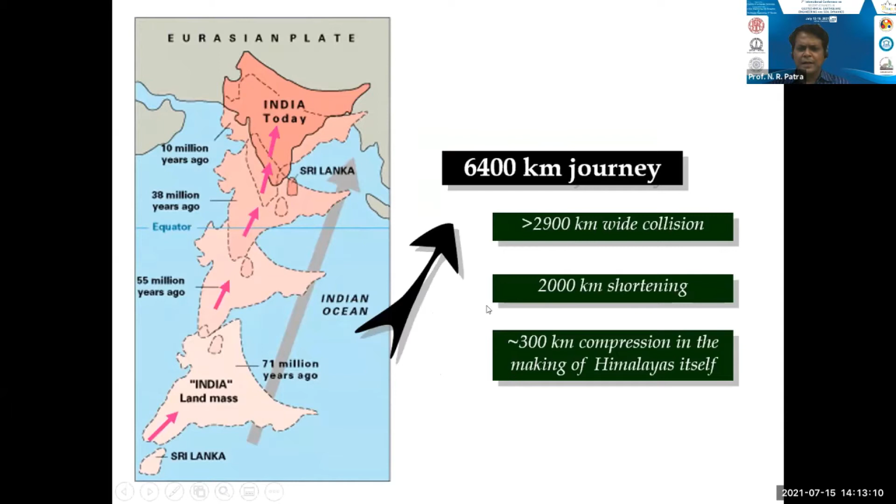Let me start briefly with how the Gangetic Plain has been formed, particularly the Himalayan region in India - how it has been formed. It is about a 6,400 kilometer journey, starting with 2,000 kilometers, and 300 kilometers of compression in making the Himalayas itself.

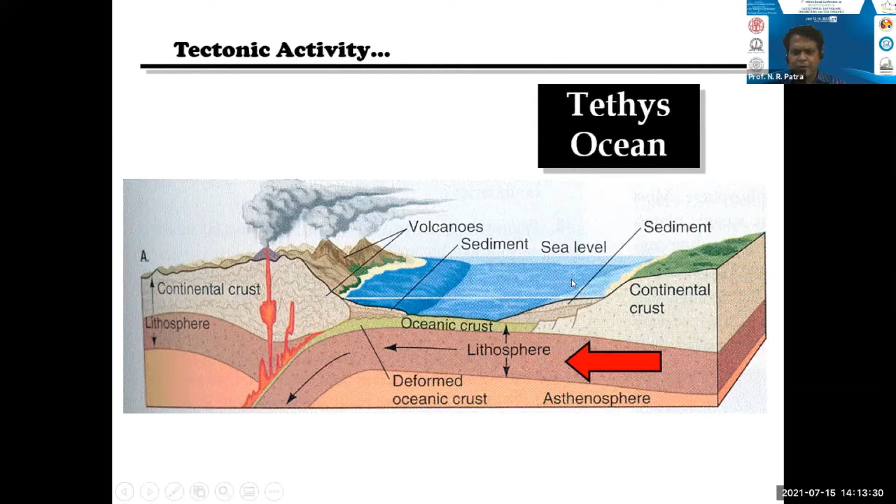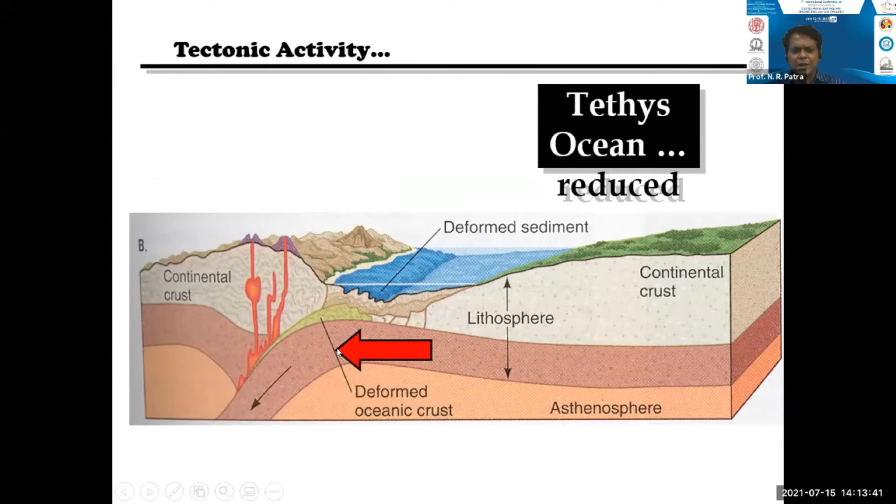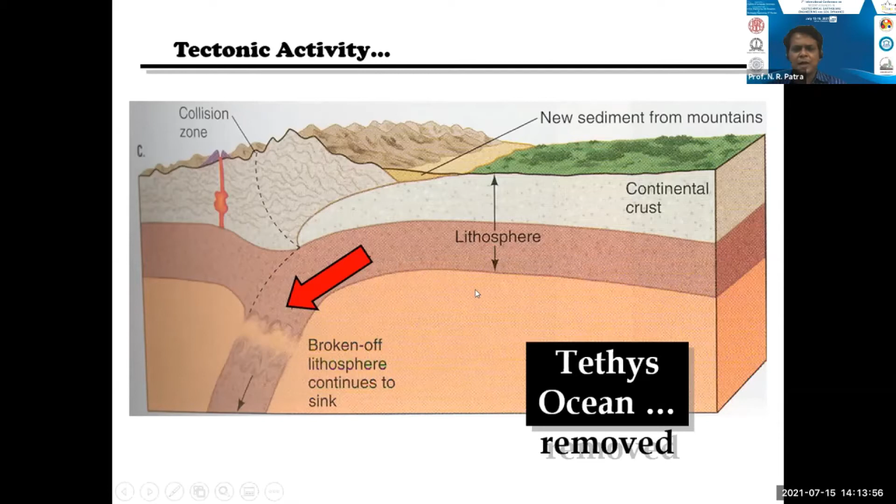Now, in brief, how this Gangetic Plain starts. If you look at tectonic activities, initially there is oceanic crust, lithosphere, and sediments, and volcanoes are present. Over the period of time, this lithosphere deforms, there is deformed sediment here, and deformed oceanic crust also. Over that period of time, new sediment from mountains, and this broken-off lithosphere continues to sink. Then remains of the Tethys Sea - this is how the geological map of India looks.

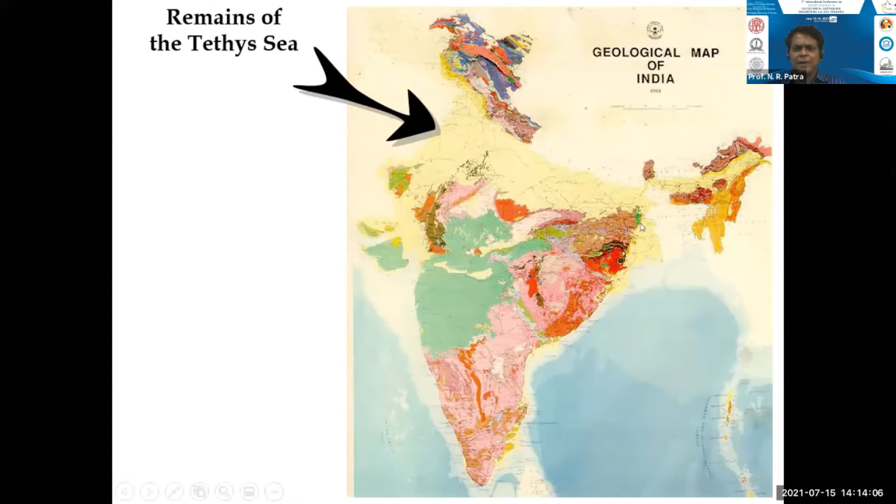Now, if I take it back, this is what we call the Gangetic Plain. It is one of the most seismically active regions in the world, I can say.

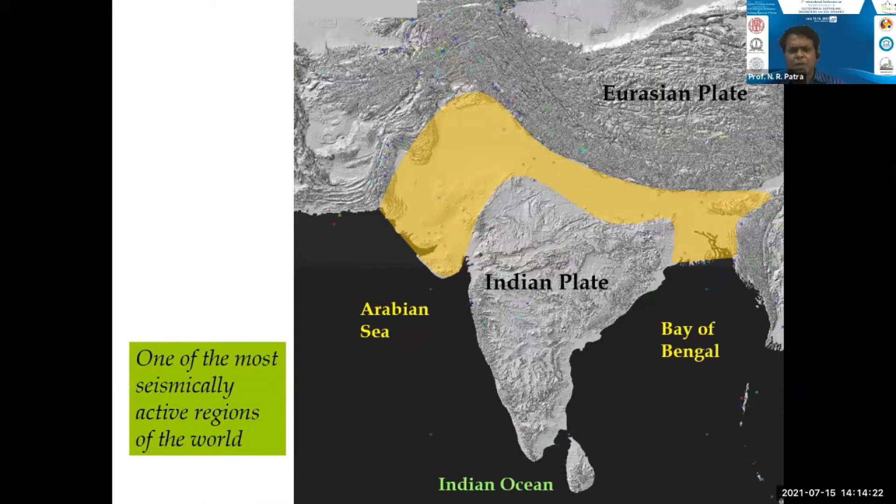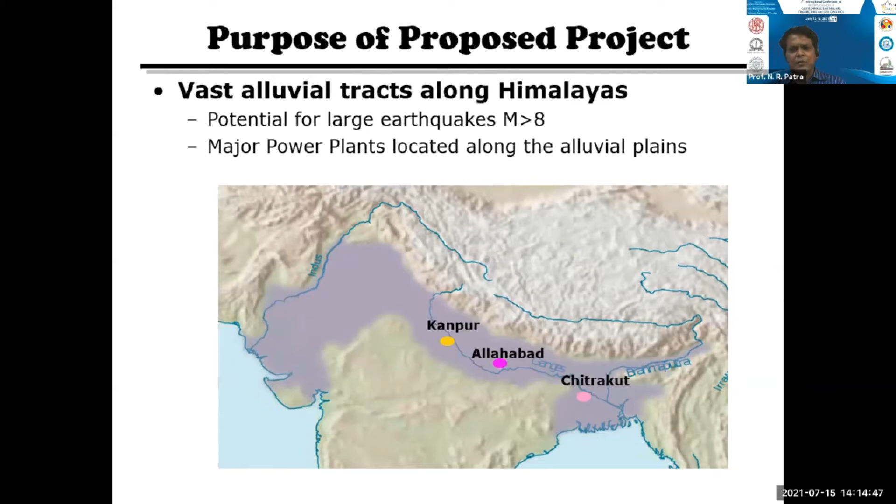These vast alluvial soils, there are soils, there are plants, and this particularly ash dikes, particularly in your power generation plants, coal ash based. So these ash dikes require huge land and proper utilization should be required. Based on that study, DST has given, and we are moving.

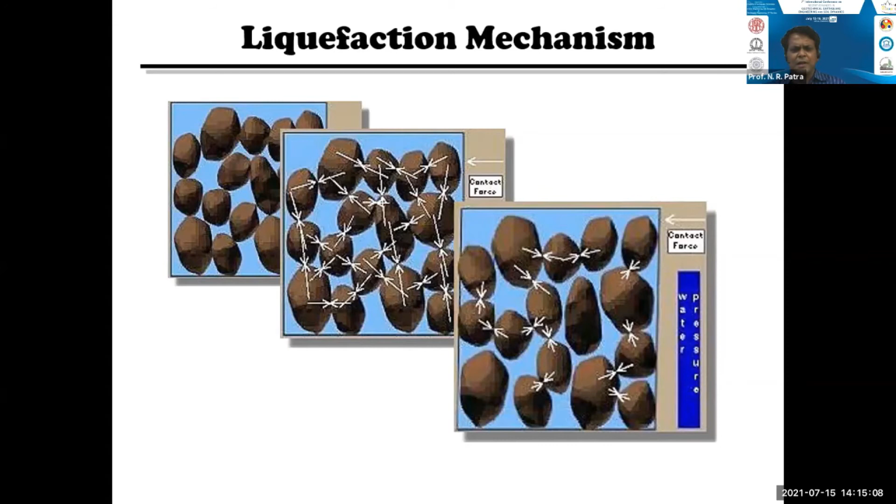I'll skip this, particularly the liquefaction mechanism, but I can give it in brief. It is because once pore water pressure increases, contact forces lose, and the liquefaction mechanism starts.

So let me start with this. What is the motive that we have moved around? It was a very painful study, I can say. Almost 36 pond ash embankments. Initially it was decided along the Gangetic Plain, but later on it was extended to go around all over India. So almost 36 embankments we started the study.

Just a few I am showing, what exactly is happening, because we are sitting at Kanpur near UP. There are many thermal power plants: Jhansi, Paricha, Anpara, Korba, Obra, Panki, Raebareli, Renusagar, Vindhyachal, Talcher. Talcher is on the eastern side, then Aligarh and Panipat. These are very close locations to us.

However, we moved from there to the southern side. We have gone to Gujarat, we have gone to Bihar, Odisha, and all along these places we have taken the ashes and pond ash, and a detailed study has been given, and the report has been submitted in 2009 in a comprehensive paper.

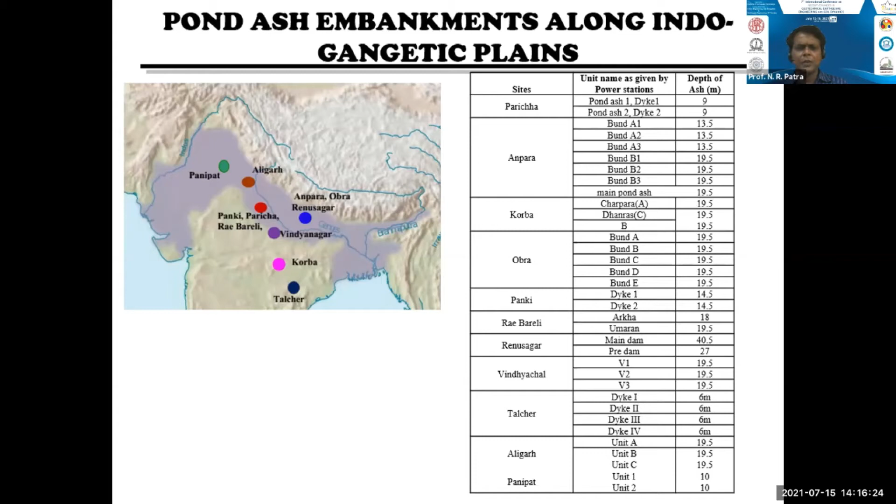Now, the pond ash project scenario: if you look at how ash disposal happens in India, this is very common, you know this. One is your wet disposal, and the other is your dry disposal. Generally, dry disposal has been avoided because it creates environmental pollution. Wet disposal involves mixing with water and putty.

If you look at the present scenario, there's about 30% utilization of ash, and about 56,700 hectares of land are required for ash ponds - this data was taken around 2020, and now it will be increased. This amount of land is required to prepare an ash dike or ash pond. So unless it has been properly utilized or used somewhere else, then you need a kind of land shortage. So that's why this requirement is there, number one.

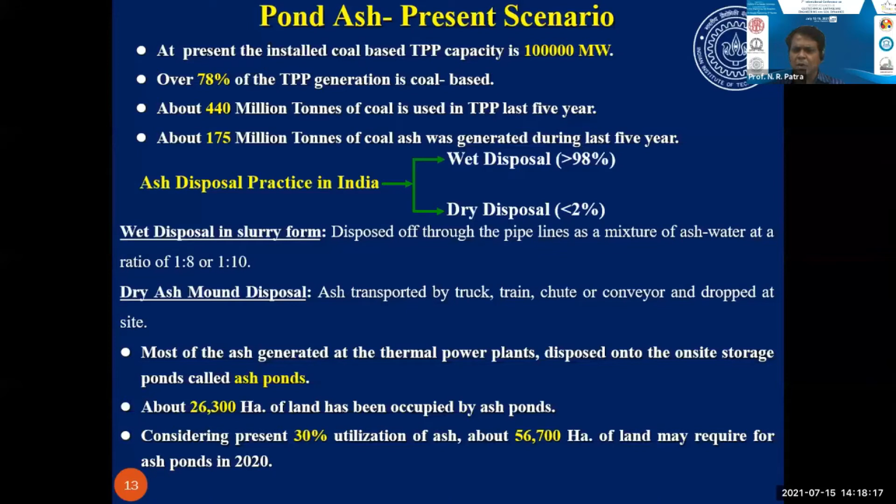Number two, is the pond ash embankment stable? Is it safe against earthquakes? The question is no. There have been recent failures of these ash embankments - one is NTPC recently, that is Singrauli. Other ones also - same, two ash dikes, both in Singrauli, one is NTPC, the other is Reliance company. And near Bihar and Odisha, I don't remember exactly, that also happened recently because proper earthquake safety and measurement had not been taken.

So if you look at the pond ash, particularly pond ash, it's fly ash or bottom ash, a mixture of bottom ash or fly ash in any proportions. So as per this classification of 1996, basically it has been classified either as silty sand or a fine fraction where the sand fraction will be more. So a study started particularly in 2008 in this area, and it is still continuing.

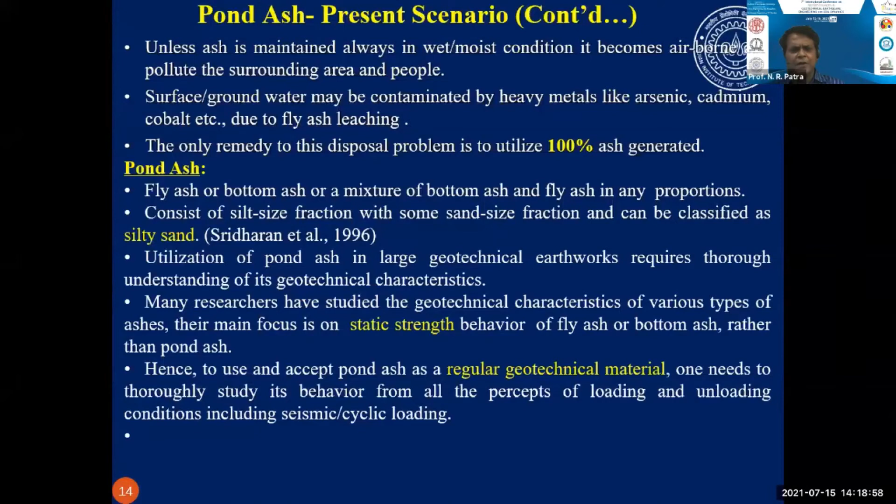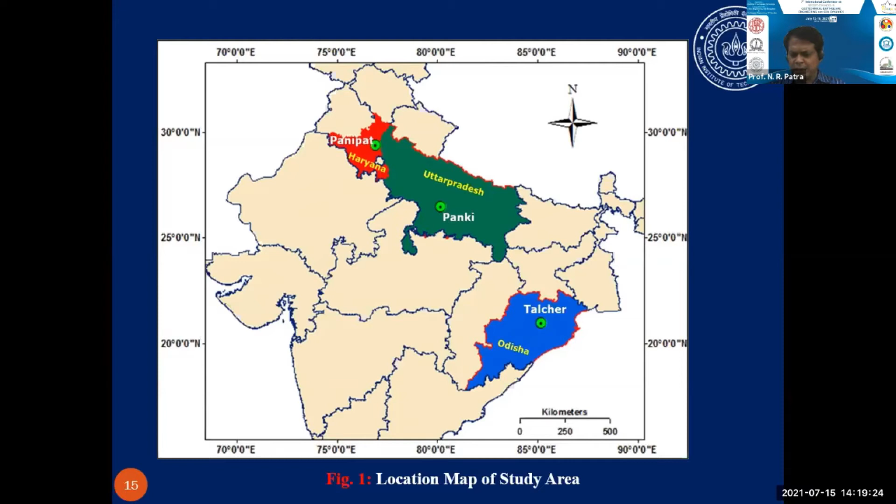So I'm showing, instead of all results, just picking up 3 different parts. Of course this is one of the PhD thesis parts I have taken. One is your Talcher side, second is your Uttar Pradesh where I'm sitting here, the Panki type, and the extreme one is your Panipat, Haryana, which comes under Zone 5. These aspects we have taken as case studies.

So before going to the sample preparation and other things, what we have done is started from scratch. Almost field study - standard penetration test, seismic downhole test, and all density measurements we have carried out. Laboratory study, geotechnical test, chemical analysis, and cyclic triaxial - all we have done.

So what does it mean by standard penetration test? Once we have carried it out, it almost gives an impression that this deposit is from loose state to either medium dense, not even dense. In almost all cases this SPT-N value varies between 5 to 10, sometimes 10 to 15, this is the range. So this is the first indication that it is either in the loose state or in medium dense conditions.

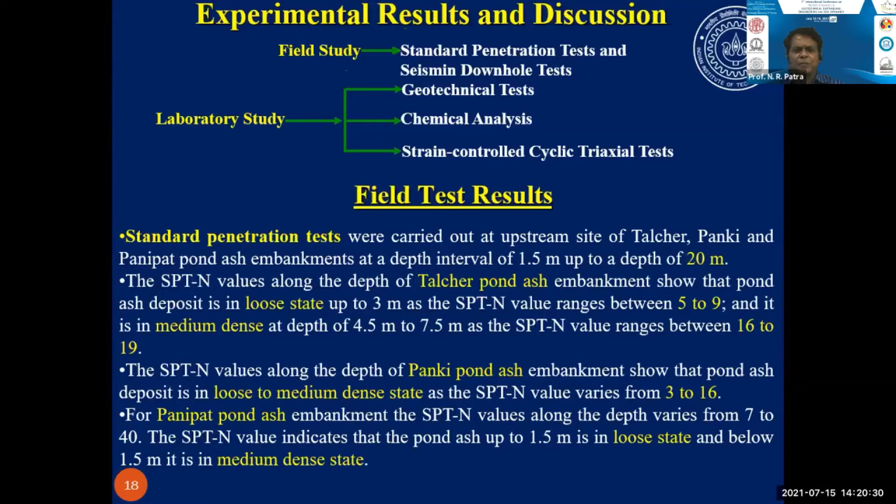Then from the field study we have collected - and it is very difficult to take out undisturbed samples, particularly pond ash from the surface - it has been remolded. Now there are 3 classifications I put in: Talcher, Panki, and Panipat. So Talcher and Panki come under poorly graded sand, and Panipat pond ash comes under silty sand. If I classify, this will be SP, SP, and SM.

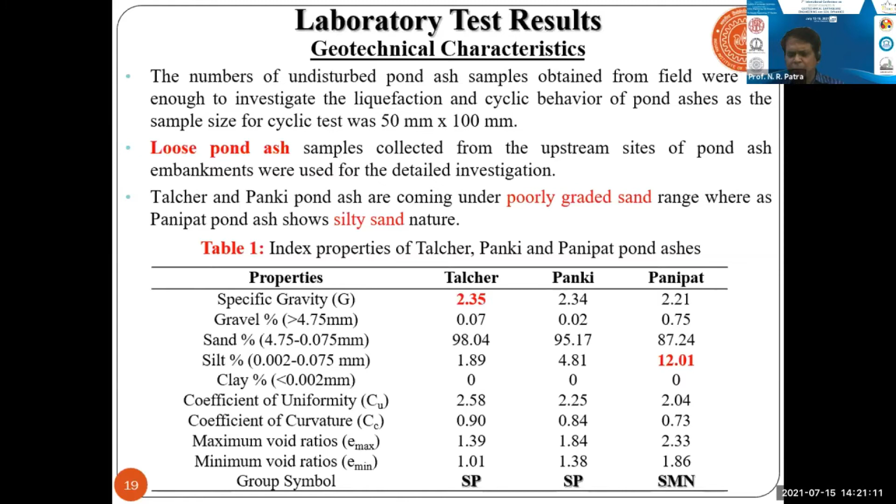This classification is there, and as this sample is very difficult to prepare, there are 2 types of sample preparations generally we go for, based on relative compaction and relative density. Based on relative compaction, depending upon how much of your fine fractions are there, and based on relative density, how much coarse fraction is there.

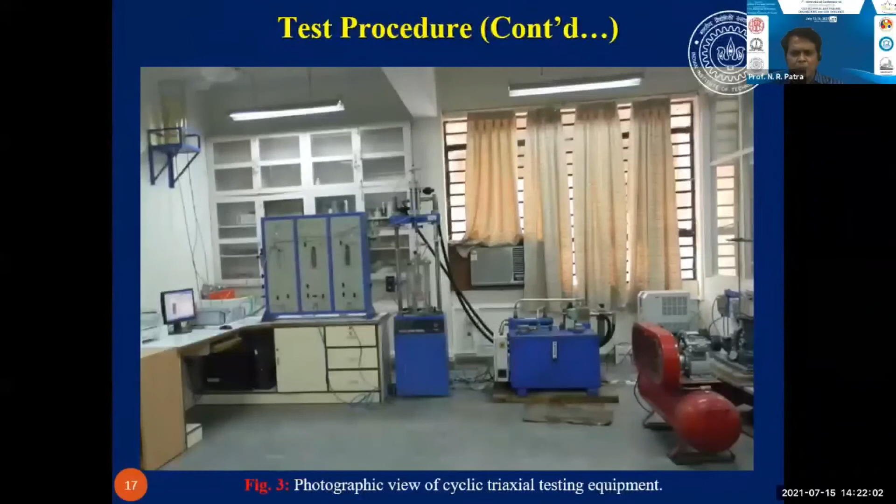If you're taking the pond ash and preparing by means of relative compaction or relative density by applying the suctions, it is high chance that this entire part will go inside and choke the valve. So proper drainage and proper saturation may not happen. So GeoNet has been provided so that it will prevent it from going inside. This is the beauty.

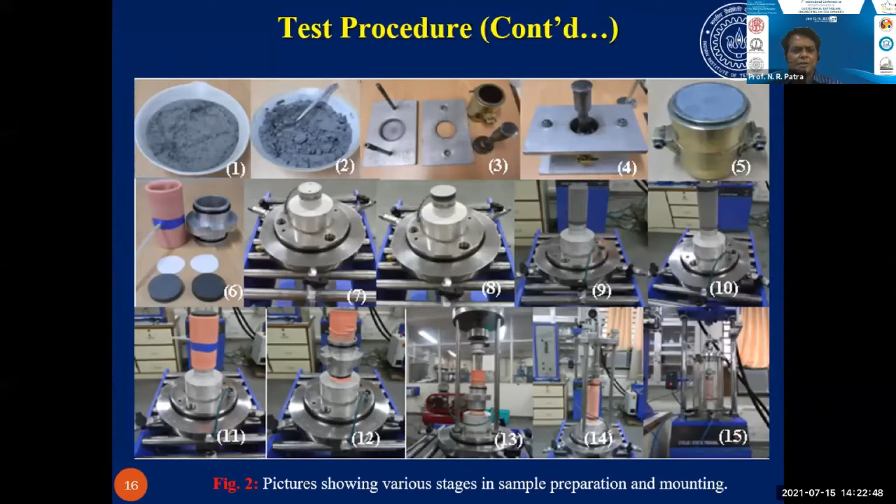So details I could not get the photographs. Otherwise, this sample preparation technique is challenging, and it has been done by means of moist tamping methods, as well as GeoNet provided for CD test or CU test around the periphery of this.

Now this is the general cyclic behavior of pond ashes in soil dynamics, earthquake engineering. I'm just showing a typical graph of deviatoric stress versus number of cycles, effective stress versus number of cycles, and pore water pressure ratio versus number of cycles. This has been cross-checked with each other. If you look at the pore water pressure versus number of cycles, we are looking at pore water pressure ratio as 1, that liquefaction starts, then is it happening simultaneously with the other parts? It can be cross-checked.

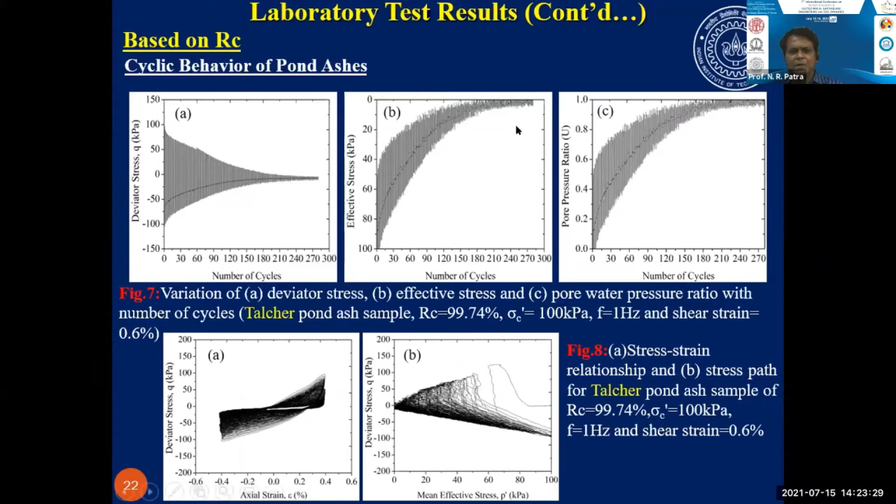Now let me come back to a typical figure showing the effect of loading frequency, confining pressure, and relative compaction on liquefaction resistance, for 3 ponds: Talcher, Panki, and Panipat. If I look at these 3 graphs, cyclic strain versus number of cycles for initial liquefaction. A is considering your loading frequency, B is the effect of confining pressure, C is the relative compaction.

If you look at the effect of relative compaction on liquefaction potential, it is more significant particularly for Talcher pond ash samples as compared to Panki and Panipat. So Panipat pond ash sample shows higher liquefaction resistance compared to Talcher and Panki pond ash under a particular frequency.

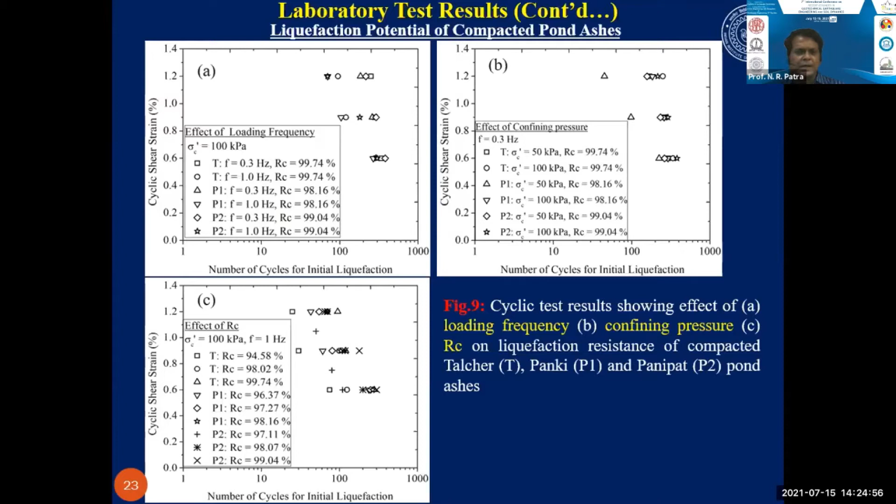These are all step by step. Once it's a field study, it gives indications of the loose state. Then we go for cyclic triaxial static test, there we get some results. Then we go for this analysis, and then we draw conclusions based on what we are getting.

Now similarly, if you look at the dynamic properties of the compacted pond ash, typically 2 figures I put: dynamic shear modulus versus number of cycles, and damping ratio versus number of cycles. If you look at this figure, the percentage increase in dynamic shear modulus with decrease in cyclic shear strain from 1.2 to 0.6% varies generally 7% to 15% and 10 to 21%.

So this is what the clear indications give, how it changes depending on where it's located, what kind of magnitude is there, what cyclic test is there, and what is the proportion, what is the fine content - all will come into the picture to explain why it is happening. Though Talcher pond ash is located differently and Panipat is located differently, I just put 3 extreme cases.

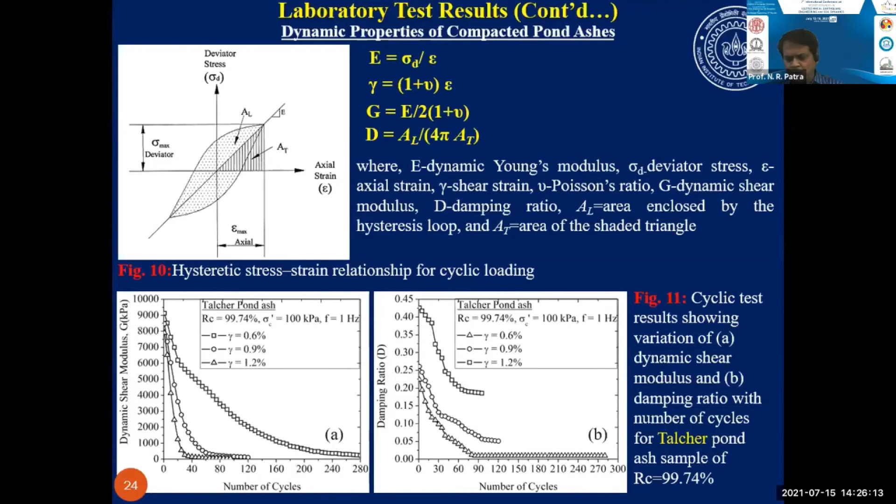Then come to the next part, the degradation index of the compacted pond ash. These results are of course based on relative compaction, and there are also relative densities. So if you look at the degradation index, this is a typical part, and you will be surprised to see, particularly if you look at this...

This one is your Talcher. It degrades at a very fast rate as number of cycles increases, and it is very steep up to 50 number of cycles. Then afterwards there is no more further change. But however, while comparing this Talcher pond ash with Panki as well as Panipat pond ash, if you look at the degradation index, it takes almost 200 to 300 cycles to completely degrade, rather than as compared to Talcher.

Talcher degrades at a very fast rate. The degradation index is well defined by Idriss 1978. It's a ratio of the dynamic secant shear modulus in the Nth cycle to the dynamic shear modulus in the first cycle. So this is well defined. If you look at the degradation index part, Talcher is degrading at a very fast rate.

What does it mean? It means it degrades. If there is an earthquake, it continuously degrades. After 50 cycles, we can say there are no more further changes. Maybe there is plasticity, other part will be there, but that part I am not going into right now.

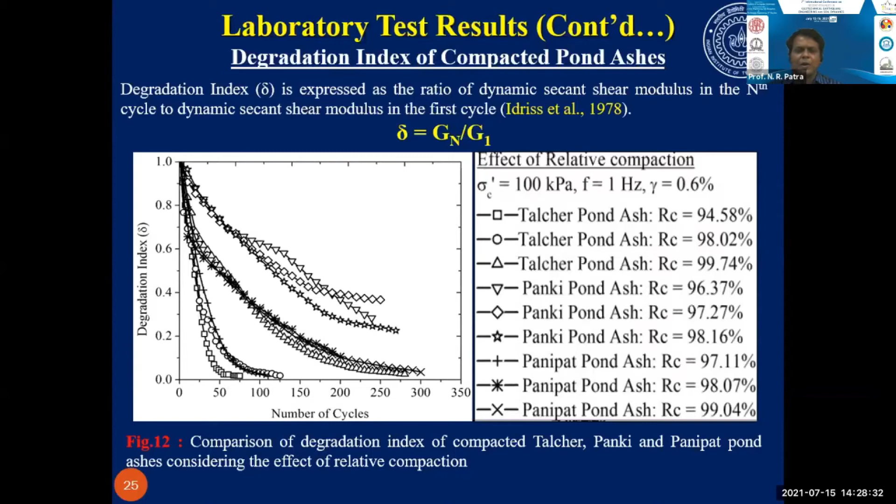Cyclic Triaxial test results. These parameters are required as input parameters, particularly for analyzing pond ash embankment.

So for dynamic response analysis, if you look at it, there are two types: one is by 1D analysis, and the other is 2D analysis.

Slope stability analysis by GEO5 has been carried out, and if you look at this, different values of horizontal seismic coefficient KH were used, and the value of KH for which the factor of safety is equal to 1 was considered as yield acceleration.

And here there is section 1, section 2, section 3. And if you look at this, this is Panki Ash Dyke, and this is your...

particularly Panipat Ash Dyke, it is 6 meters. Here the water table is located approximately 7 meters below the crest. And these are the detailed dimensions that have been given.

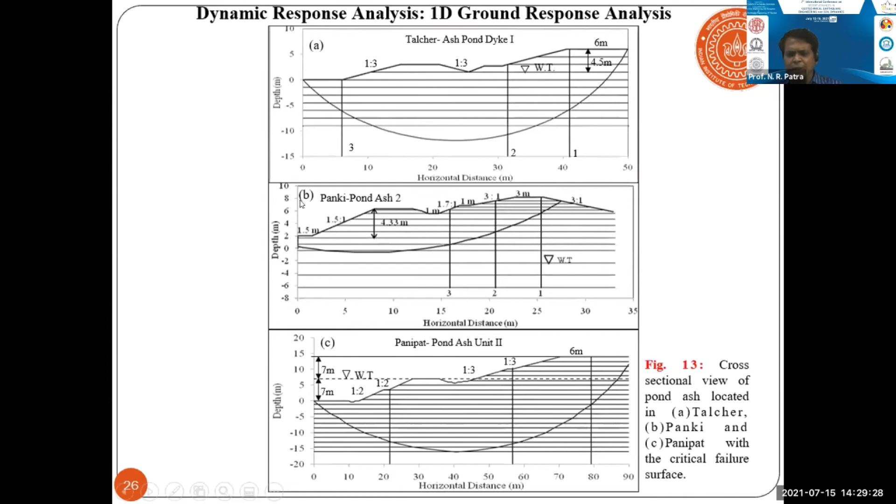These are the assumptions that were set, as everyone knows how this works.

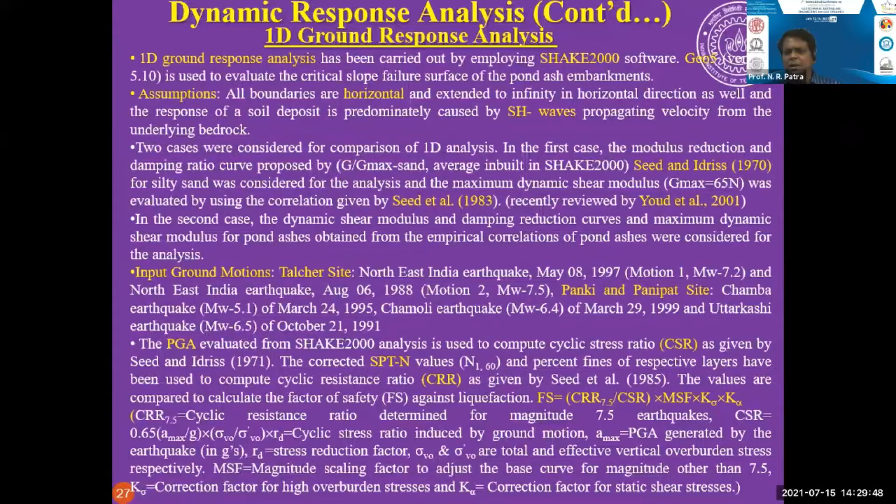For input ground motions, we have considered the northeast Indian earthquake, and for Panki and Panipat, because they lie nearer to the Himalayan thrust, we considered Chamba, Chamoli and Uttarkashi. It has been accordingly scaled down or scaled up.

It has been done. Now come back to 2D response analysis. It has been done by means of OpenSees, and constitutive modeling for the pond ash material uses pressure-dependent and pressure-independent multi-yield material models, generally used for cohesionless and cohesive materials.

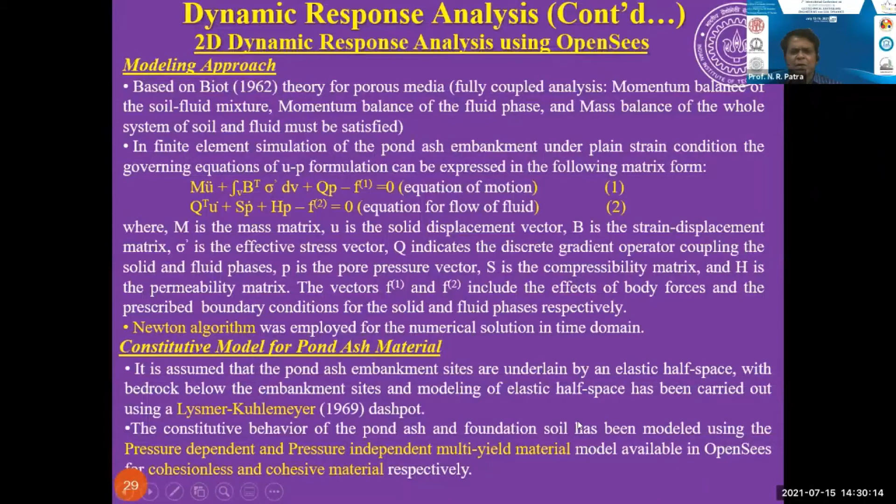Then, particularly, 9-4 quad UP elements were used: 9-noded with corner nodes having 3 degrees of freedom, and the interior node having 2 degrees of freedom, with zero-length elements applied.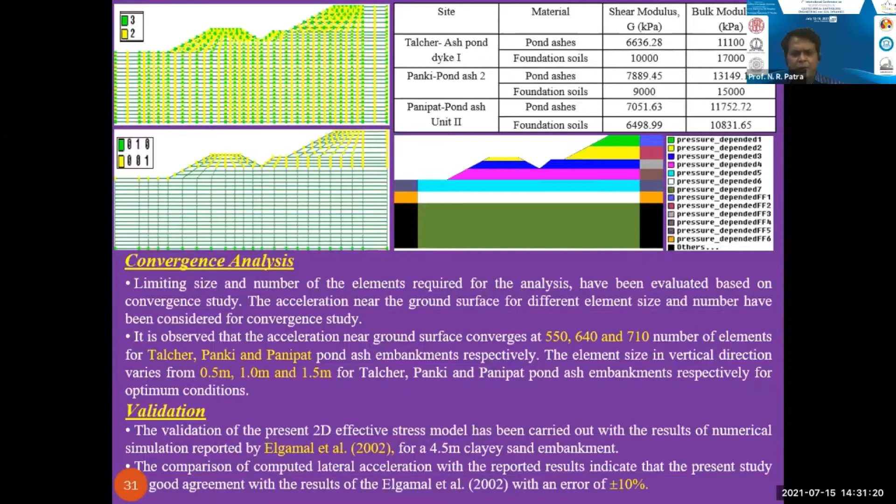Then detailed convergence analysis has been done, and validation has been done with previously reported work. Though it is not with this same embankment, it has been reported particularly with a 4.5 meter clayey sand embankment. This is how the validation has been done, and it is graphically represented.

Now, coming back to the dynamic response analysis, one is on the upstream side, and the numbering is there, showing how it has been done. It has been done with the help of GID 7.2 and GiD Flow 8, and visualization has also been taken into picture so that we can take care of every part of what is happening.

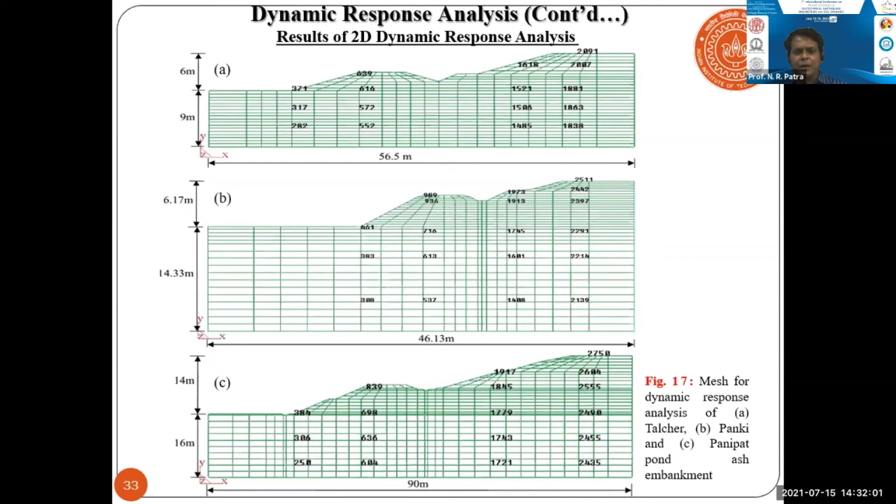Now let me come back to the first one, the visualizations. If you look here, variation of horizontal displacements for the existing condition - there are two conditions considered for this analysis. One is the existing water table condition, and the second is full saturation, which may be the worst condition.

One is completely at plot level. Recently, I got a bigger consultancy project, that is in Rihand, where we are working on partial buttressing, considering a complete submerged condition.

So there are two cases: one considering natural water table, the other considering full saturation or submerged conditions. If you look at the ranges, this is a typical diagram.

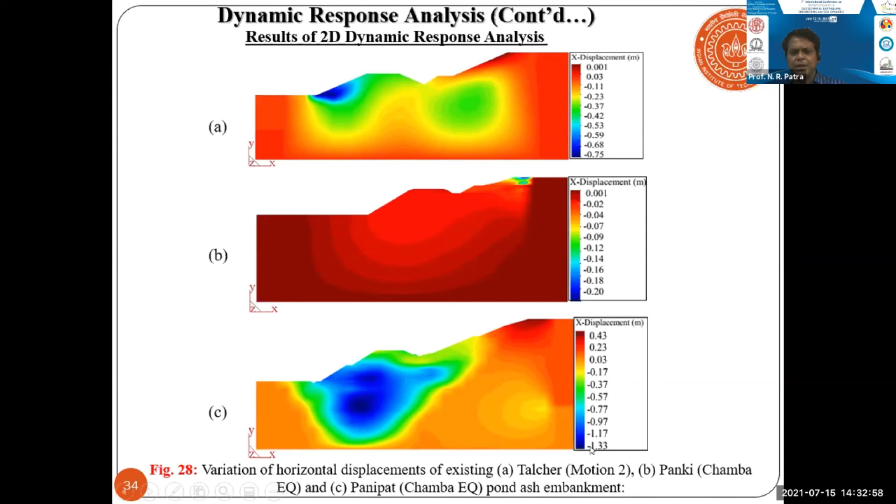What is the horizontal displacement? It is 1.33 meters, which is quite large. Then, similarly, for vertical displacement, it is about 0.45 to almost 1.6, 1.7, 1.8 meters.

So as the node numbering has been done, I showed the typical part of how the node numbering has been made, and from there how it has been carried out.

This visualization shows the variation of vertical as well as horizontal displacement of existing conditions, meaning we assume the water table is the same as in the existing condition.

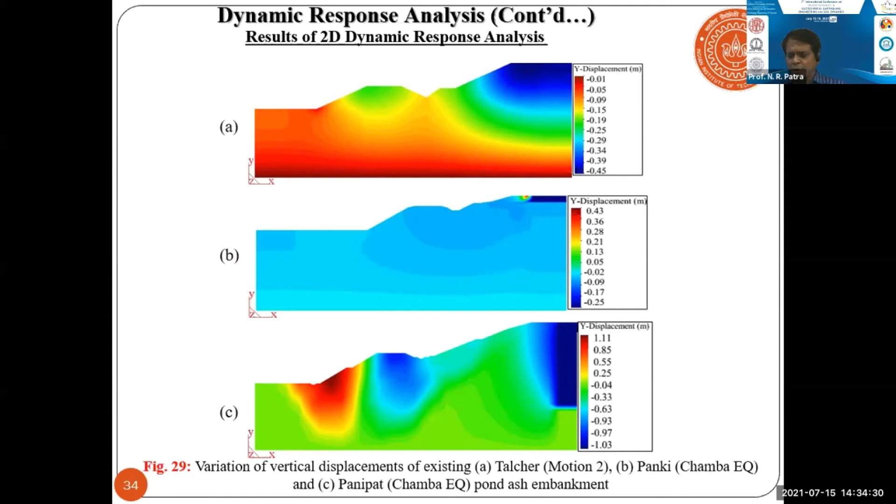Based on this, we have three parts: field study and laboratory study, which give indications directly. The shear velocity value and SPTN value have been utilized, and laboratory dynamic properties have been taken into consideration. We carried out response analysis for almost all pond ash embankments, made a comparative study, and classified it zone-wise by what kind of pond ash is there. Earlier there were different classifications, but we have given detailed guidelines on what is supposed to be done.

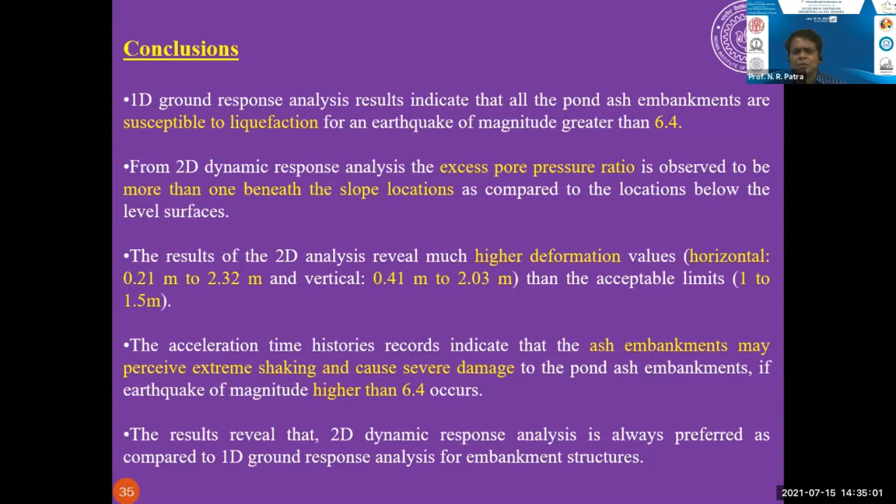Let me put the conclusions simply. The results of 2D analysis reveal much higher deformation values, about 0.21 meter to 2.32 meter in horizontal, and vertical 0.41 meter to 2.03 meter. So almost all pond ash embankments are susceptible to liquefaction, as shown in these three cases.

Now let me start with a new one. It was a kind of challenging case: the Renusagar pond ash embankment.

If you look at the sea level here, 352, and here it is 300, so it is a 52 meter high pond ash embankment. Professor Dayal at that time started this design, but later it was changed. Now there is bund 1, bund 2, so it is almost 52 meters. The ground water table is 7.5 meters below the crest.

This was interesting, and the same way we started generating our own finite element code, OpenSees, as well as other parts. So the same way, SPTN values were obtained particularly for the pond ash embankment as well as foundation soil.

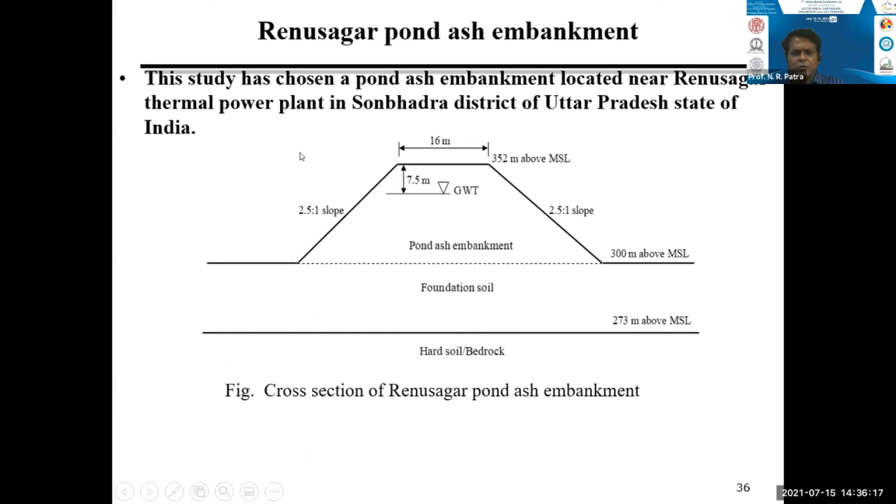This is one of the publications of Yadav et al. 2011, which has been taken. For the pond ash embankment, particularly in Sonbhadra district, this Renusagar pond ash embankment is 52 meters in height. If you look at it, the SPTN value is almost between 10 to 15, but the foundation soil is slightly denser, between 15 to 20.

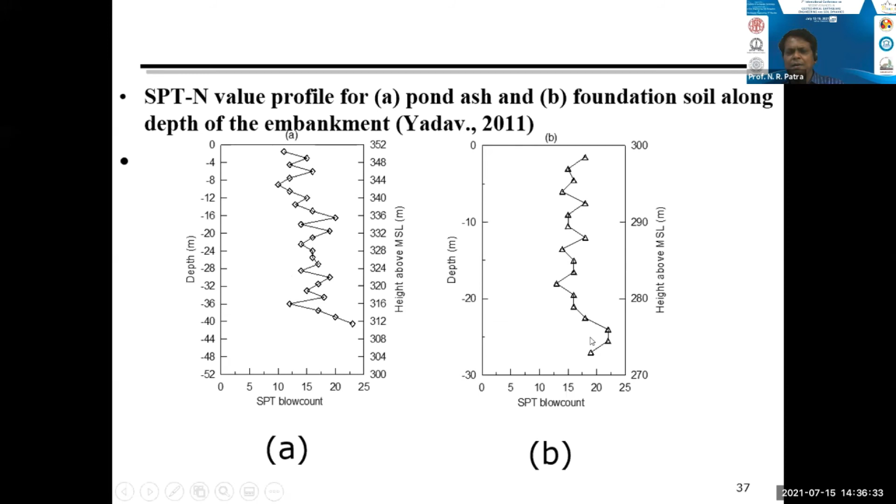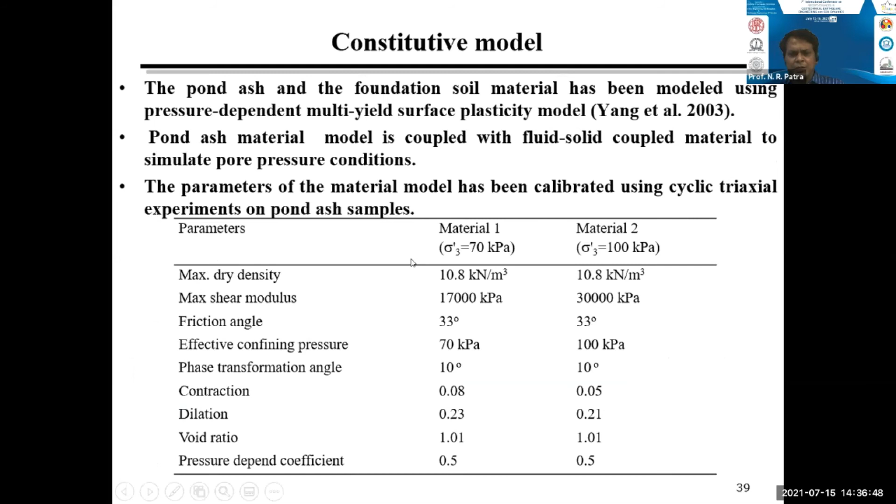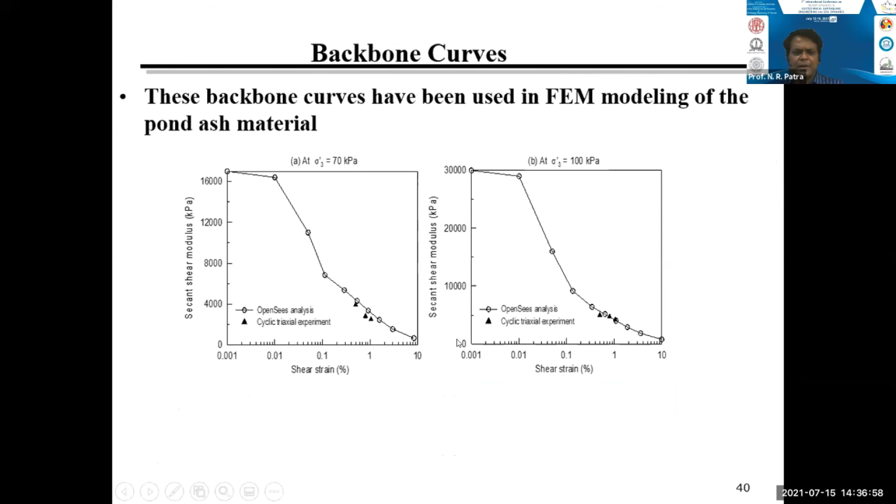Then finite element analysis has been done, both in OpenSees, and it has been developed. Then material properties from experimental investigation have been considered. The backbone curve, using finite element analysis, has been developed based on the cyclic triaxial experiment.

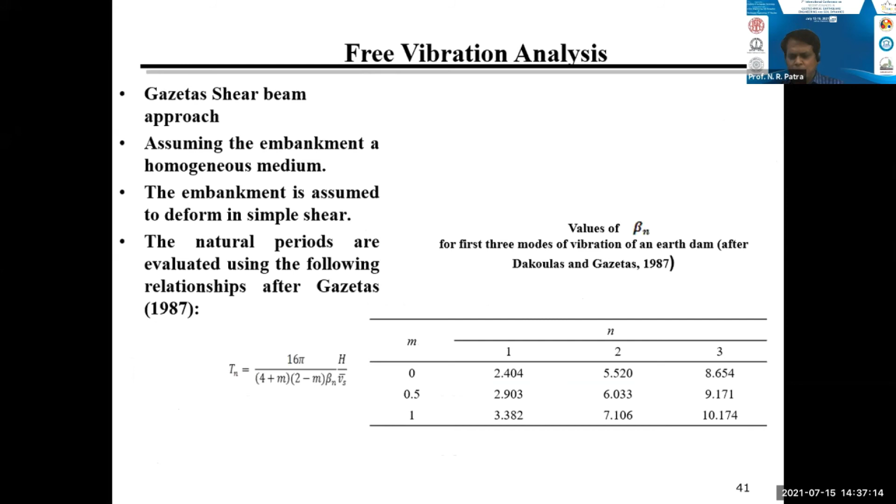Free vibration analysis as well as post-vibration analysis has been done, and natural periods are evaluated using the relationship given by Gazetas. For this pond ash embankment in seconds, looking at the first mode, after Gazetas 1987 it is 0.63, and based on our finite element study it is 0.7.

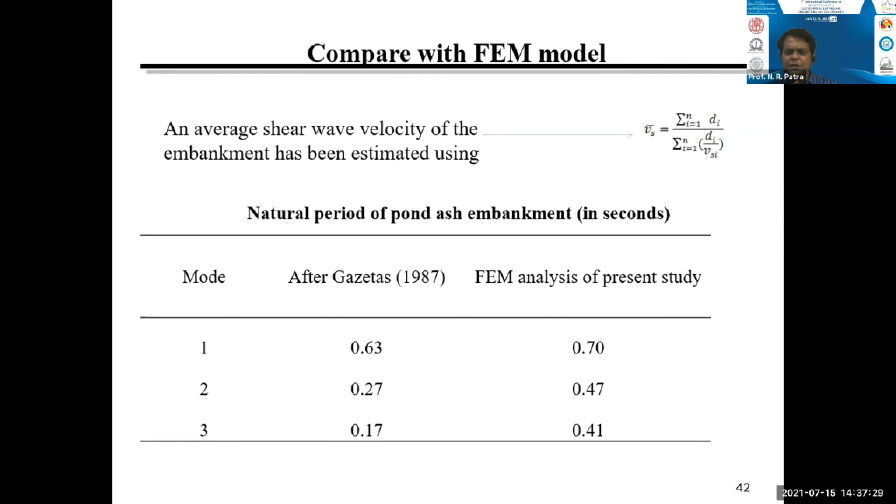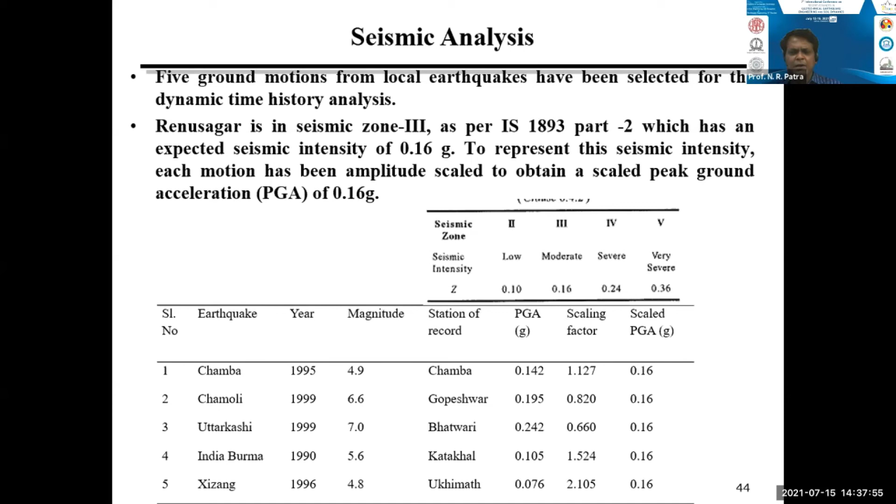Then the seismic analysis has been done, with 5 earthquakes considered: Chamba, Chamoli, Uttarkashi, India Burma, and Xizang. Details have been shown on how it has been scaled down and scaled up, the scaling factor, the recording station, and magnitude.

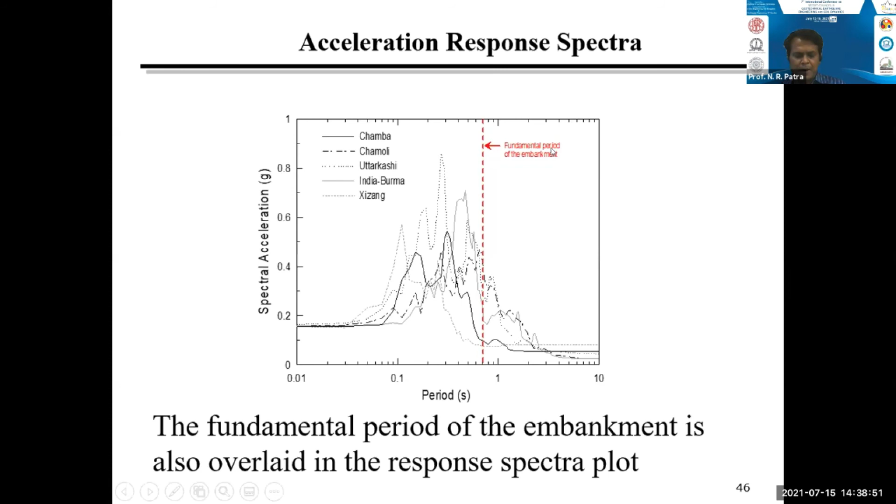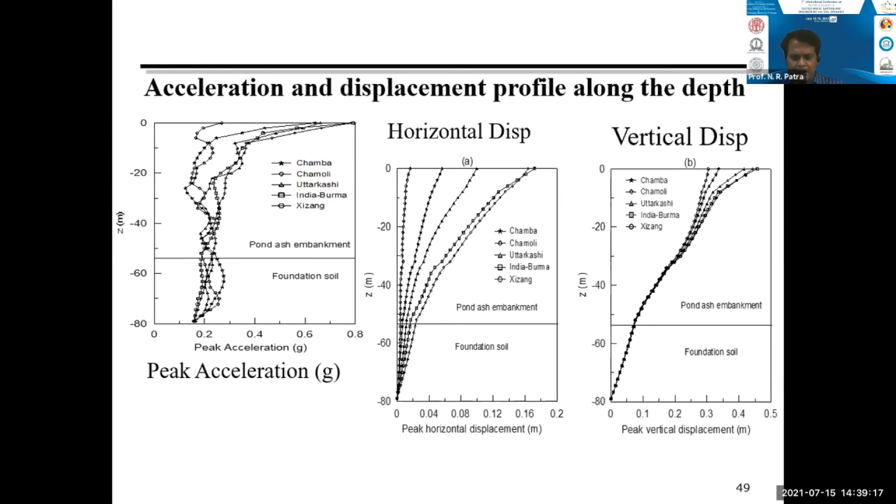Peak ground acceleration versus displacement: here's peak horizontal, and the vertical is there. The vertical displacement shows even higher amplification, particularly at the crest level.

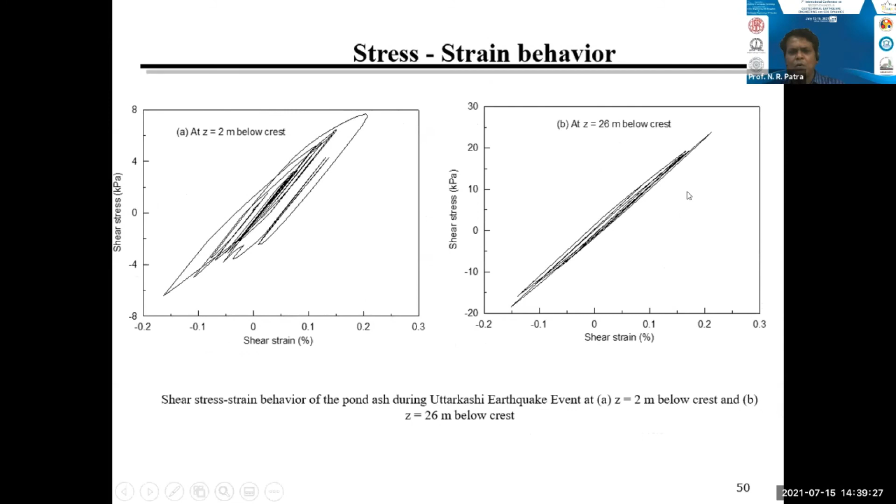I don't want to go into the details. Let me go to the simple comparison with the available literature. This range has been given by Elia et al., 2013.

If you look at this, there is a large variation of response which may be attributed to different magnitude, energy content, and dominant frequency. The mean amplification profile lies within the range provided in the literature. Chamba and Xizang earthquakes, having low magnitude, provided the lower bound, whereas Uttarkashi, with the highest magnitude, is in the upper bound.

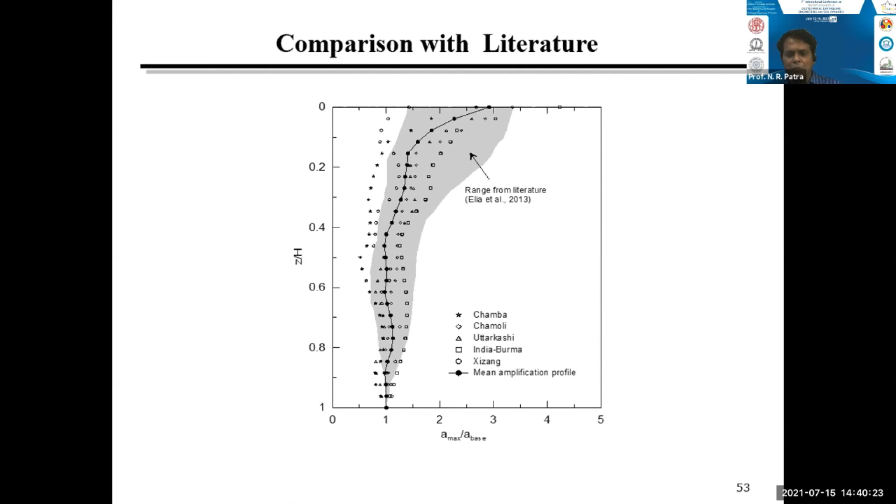From the numerical investigation, since we used it as a case study, it is a 52-meter height embankment. A significant amplification in the acceleration response has been observed between the base and crest. The pond ash embankment has shown susceptibility to liquefaction.

For the next stage, we have started with geosynthetics and ground improvement techniques. Since it is already constructed, with first raising, second raising, third raising already done, we are now involved in buttressing, either partial or full buttressing. This is how the extended study continues.

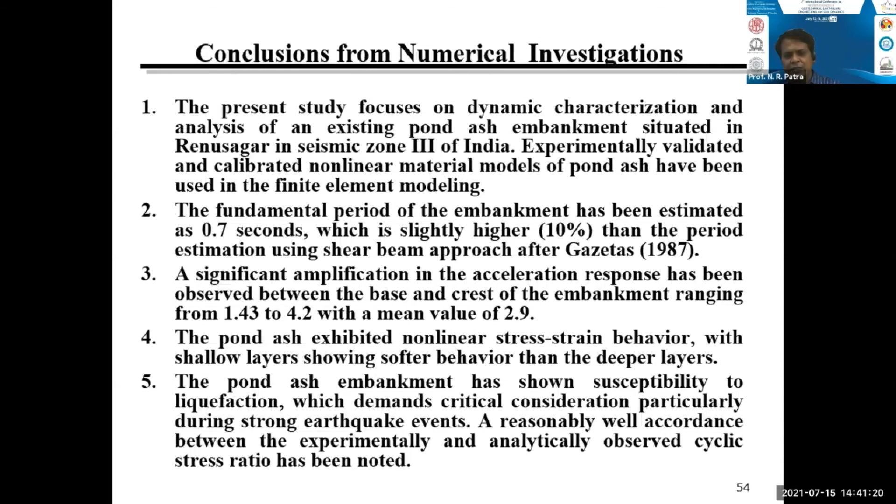Consultancy is different, and this is the kind of research study going on. The entire presentation I have taken from the publications of my students, selected publications, from where it has been taken.

It is really very difficult to do the stress, field study, lab study, and analysis. It was painful to go to the field, stay, and do the job. But thankful to all the students who have been associated, almost 6 PhD students graduated considering this area, and 10 to 12 MTech students. I thank all of you.

So this is all about the talk.